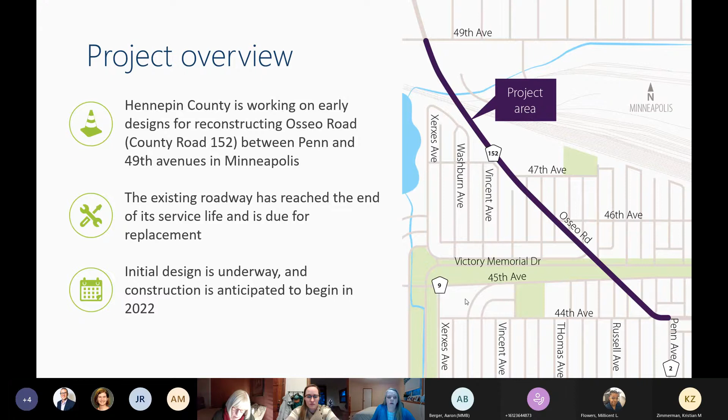The initial design was presented back in July via virtual open house and here at the August BAC meeting. We've also met with the Minneapolis PAC, the Hennepin County's BAC, Council Member Cunningham, and the Victory Neighborhood Association. So after reviewing the feedback from the community and working with our project partners, we've made some modifications to the typical sections and the geometry, which I will be presenting to you today. So a few of the general changes to the design include the addition of many new ADA ped ramps and crossings, the striping of the trail, and the pedestrian level lighting added to the typical sections. And the change of Russell Avenue from a right-in, right-out to a full closure.

I also wanted to note, since we last met, a dynamic speed sign was installed on the southbound side leading into the Penn Avenue curve. The city also relocated their advanced warning sign for this curve and did some tree trimming to help with the sight distance at the Penn Avenue curve.

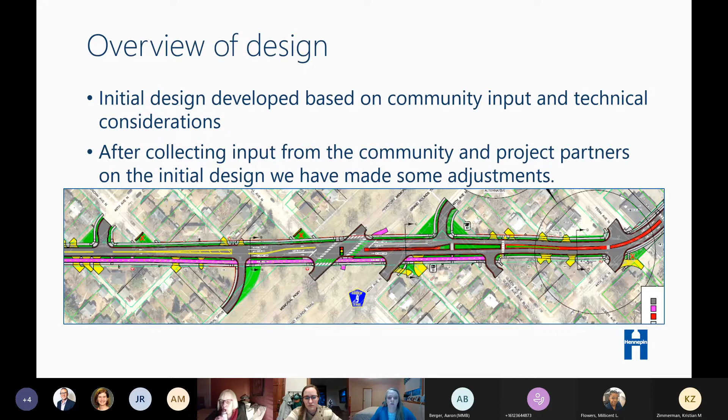With Osseo Road being a very diverse corridor with businesses, a regional trail, and residential areas, we kept the corridor separated into 6 major configurations or typical sections. The major change we've made is separating the multi-use trail, putting it on the west side, and adjusting the 2 sidewalks along either side of Osseo Road. I'll start on the north end and run through our proposed typical sections.

Starting on the north end, in this left typical section, we are matching into the existing roadway with 2 11-foot travel lanes and both left and right turn lanes at the 49th Avenue intersection. We are adding a 5-foot grass boulevard, a 10-foot trail, and a 6-foot sidewalk with a 1-foot detectable edge between them on the west side, and a 6-foot sidewalk on the opposing side, also separated by a grass boulevard.

On the north typical, or right side typical section, is our bridge section, where we're taking the existing 3-lane section and continuing with 2 11-foot travel lanes and outside 5-foot shoulders, which did not change. What did change is the 10-foot trail and 6-foot walk, separated by a 1-foot detectable edge, and then the 6-foot sidewalk on the opposing side.

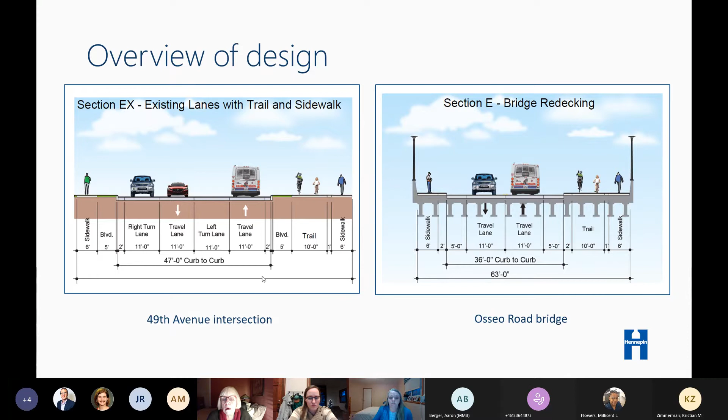As we continue into the corridor, we move into our main section, Section A. In this section, we are replacing the in-place 3-lane sections and outside bike lanes with 2 11-foot travel lanes, which remains the same as before. We are adjusting to a 5-foot grass boulevard on either side of the roadway with a 10-foot trail and 6-foot sidewalk, again separated by that 1-foot detectable edge, and then the 6-foot sidewalk on the opposing side.

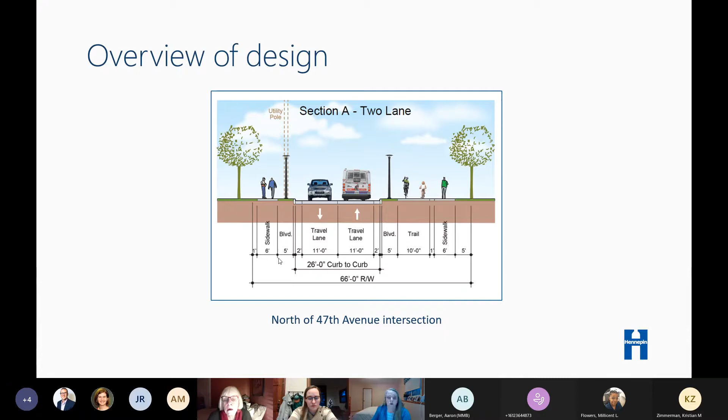Here we have a rendering of this section. We are looking south down Osseo Road at 47th Avenue. At this intersection, we are showing the proposed BRT station and the RRFB. You can also see the trail and walk separated by that 1-foot detectable edge, and grass boulevards on either side.

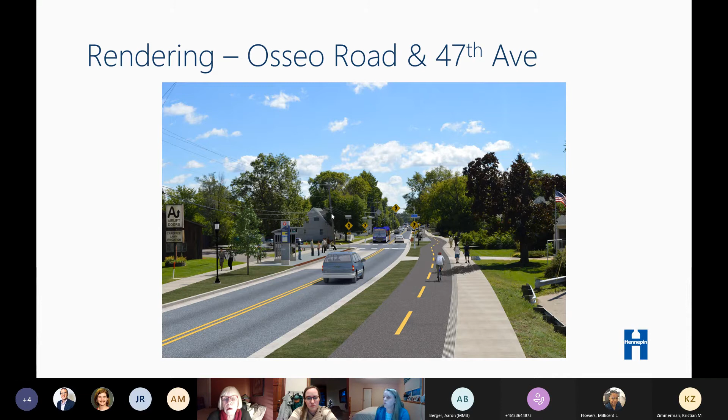As we continue down, we now run through the B and C sections. In the left typical section, we're transitioning to a 3-lane section with a left turn lane at the Memorial Drive and Russell Avenue intersections. This part remains the same; what we're adjusting is the 10-foot trail and the 6-foot walk, with the opposing side also having a 6-foot walk. These 5-foot boulevards are replacing the previous 7-foot boulevards that we had.

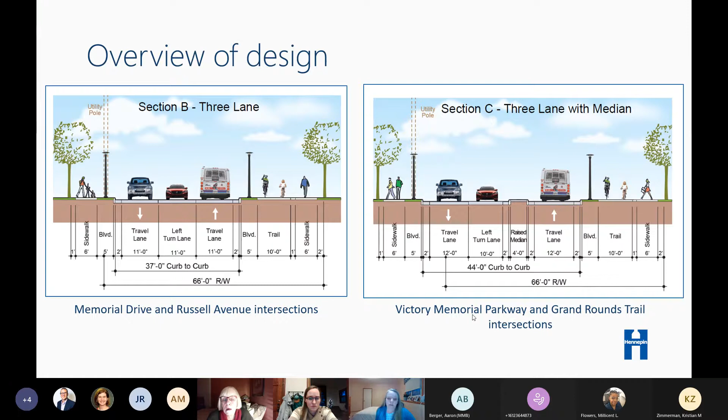On the right typical section, at the Victory Memorial Parkway and Grand Rounds Trail intersection, we introduced a raised median to define this left turn lane for additional pedestrian and bike safety. The part that was adjusted is the 10-foot trail and 6-foot walk, separated by the detectable edge, and the 6-foot sidewalk on the opposing side, again separated by that 5-foot boulevard.

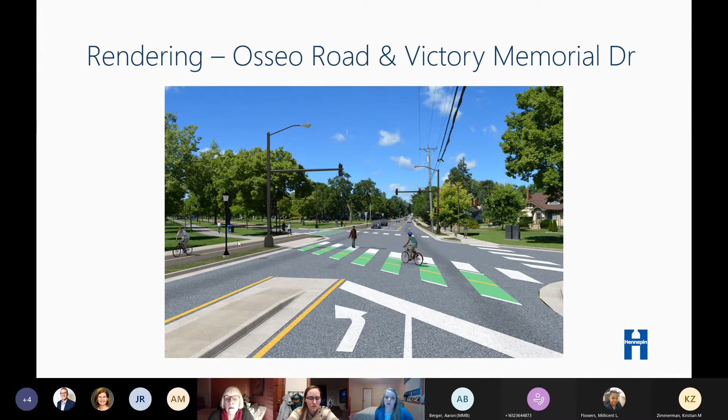Here's another rendering of this section. We are looking north this time at Osseo Road and the Victory Memorial Parkway or Drive intersection. In this intersection, we are showing the new signal, the proposed median, and pedestrian bike crossings. You can also see the trail and the walk on the west side, and the sidewalk on the east side.

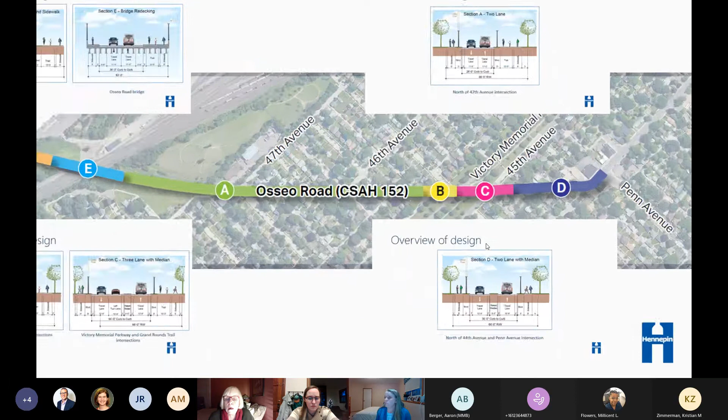The last section we'll move into is Section D, from Queen Avenue to Penn Avenue. In this section, we have two 12-foot travel lanes with a raised median. The need for this 12-foot lane and 2-foot gutter on either side is to accommodate a county snowplow and the space needed to navigate the curve that this typical section falls in. As we move into final design, as we start our drainage review of the corridor, we look at the median, and if it needs drainage structures, we need to keep that 2-foot gutter.

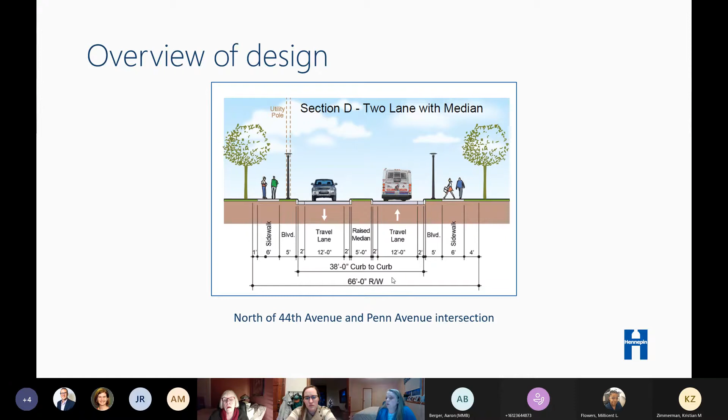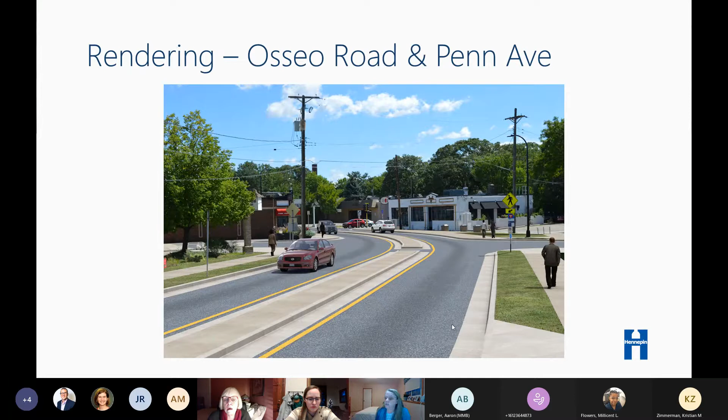If the drainage can be pushed to the outside lane, we may be able to reduce that gutter to a 1-foot gutter. We also transition the 10-foot trail on the west side to just a single sidewalk on either side with grass boulevards. We are also reviewing the possibility of adjusting the west side here to make this a multi-use trail through the section between Queen Avenue and 44th. Here is another rendering of this section, looking south at the Queen Avenue, Penn Avenue, and 44th Avenue intersection. You can see the raised median, the 2 travel lanes, the outside grass boulevards, and the 6-foot sidewalk on either side of the roadway.

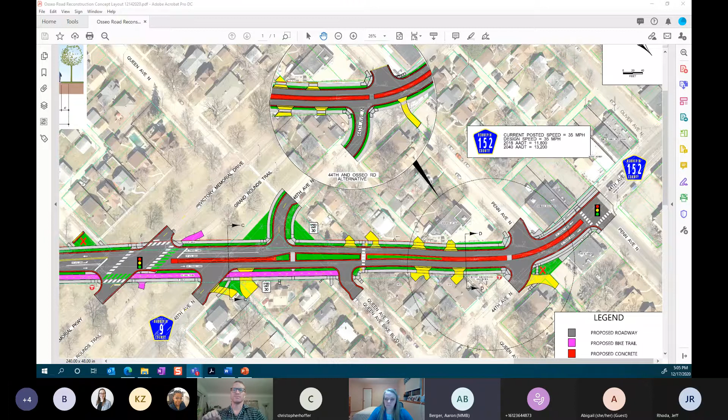I don't have any sense of what the chances are that we can get something that is not so terrible for walking. A way of, if it's going to be medians, it needs to go through to really reduce that turn radius. Anything less than that, and it's very clear that no one outside of cars is being considered.

I'm not sure how to put that in a resolution. Okay, I'm calling out the currently designed medians. So yeah, is that okay? Sure, if other people are comfortable with that.

I'm processing this project. Aaron, can you email that resolution as you've written it to Millicent, and perhaps we will send it out to the full committee, and if there are strategic specific changes, you could prepare those and have them ready for the full. Yeah, for sure, I mean, it's hard to draft on the fly, but yes. Sure, right, no, totally, yeah.

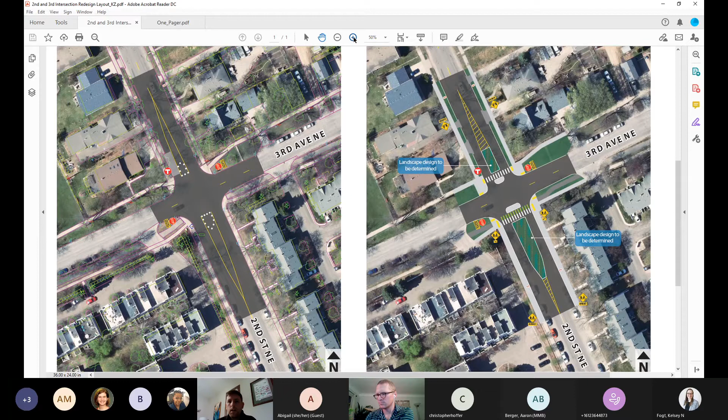So what we've done, zooming in, is really just formalize those medians into a permanent design and have upgraded or are looking to upgrade the corners here to give ADA compliance. This design really narrows down the travel lanes significantly from what's out there, and also adds in medians that would be permanent with a little bit of striping behind them to kind of lead in.

These medians would absolutely be filled in with landscape. We're still working on what that landscape would be, whether at some point it would just be turf, or if it's going to be planted with perennial grasses that would be taken care of once a year, native species.

Additionally with the crosswalks, we're looking to mark those potentially with the sidewalk through here, and with the trail, upgrading to have the ADA curb ramps, keeping the signage that's currently out there, but also adding some additional signage notifying that we have a trail crossing here, and roughly 150 feet back would be more signs that would just warn motorists that there is a crossing up ahead. And similarly on this side, you'd be notified of a trail ahead.

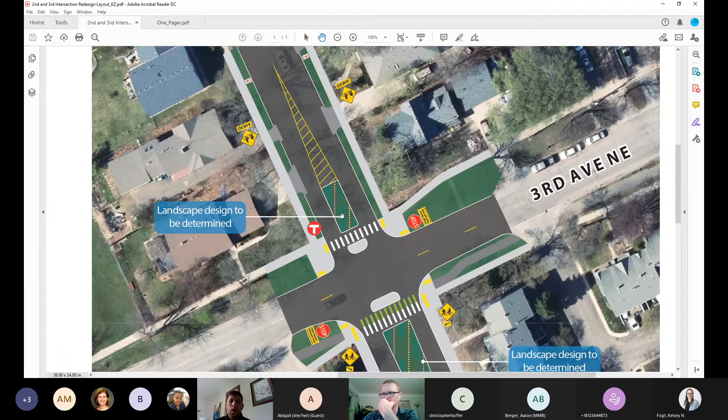Again, there would be some landscaping determined at this median. We've provided nose outs to give further protection to pedestrians within the crosswalk, giving them a little bit of refuge and increased safety. The bus stop stays uninterrupted from its current stop.

Additionally, speed limits have been updated in this area. We're at 25 miles an hour now on 2nd, and 20 miles an hour on 3rd.

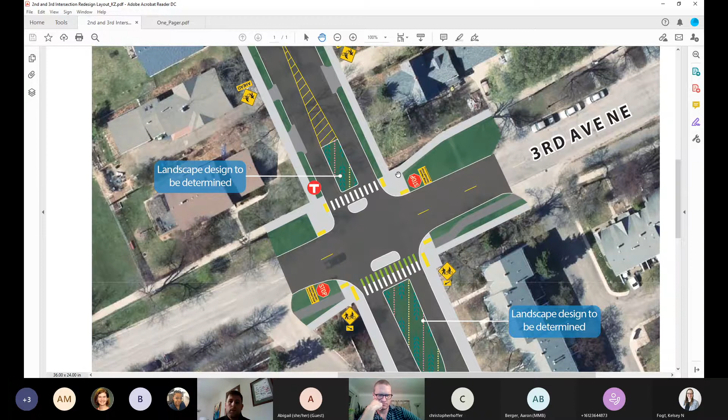With this, we would slightly update a little bit of the sidewalk. There's some odd geometry that was installed here originally, so we're looking to straighten up the sidewalks as best we can to take out those jogs, due to some infrastructure we just can't get into. Some jogs are being corrected to an extent but wouldn't fully be eliminated, but it's definitely an improvement over what's currently there.

With that, I'll open up for questions and discussion.

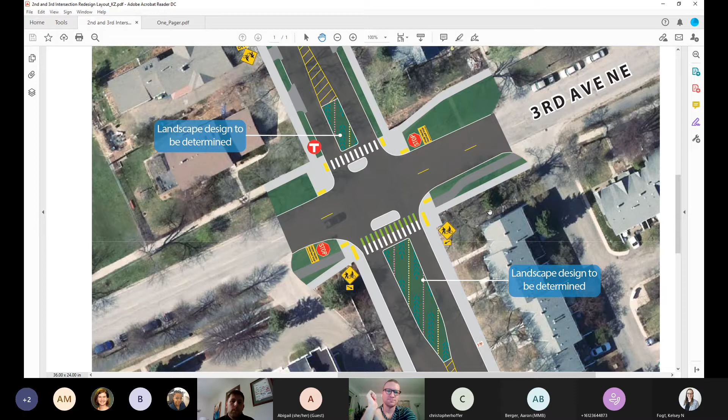Why is it a median instead of bump outs? So bump outs were tried at this location back in, I think, 2015, and they were just at this corner and then at this corner. They did have a little bit of success, but there were still some crashes going on at this location. So it was changed to a median design in 2017 when the mill and overlay came through, and they found we were having better success with crash rates lowering with this design.

It wasn't tried with full bump outs on all corners, it was sort of half of what it would have been. So if you were heading north on 2nd Street from First, the bump outs would have been at those two corners—just two of the same corners on different sides of the street, not at all four.

This design shows medians on both sides of 3rd on 2nd Street. So it did narrow the crossing distance—essentially by the length of two bump outs with the original design. The crossing distance is the same now, but we're providing pedestrian refuge with the medians, and it'll snub out further than the crosswalk. Correct, there's a nose out on each median.

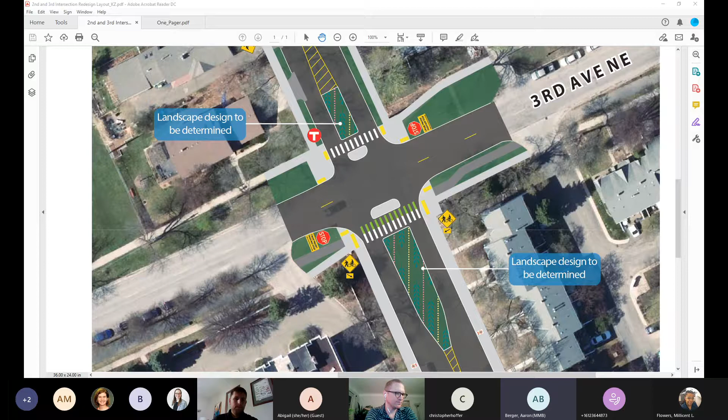The next project is West 31st Street pedestrian safety improvements from Amy Morgan. Hey everyone, thank you for having me. Yes, I'm here to talk about the West 31st Street Ped Safety Improvement Project at the intersections of Emerson Avenue and Dupont Avenue. As I mentioned last time, these two intersections were part of a pilot program back in 2013, and temporary bump outs were installed.

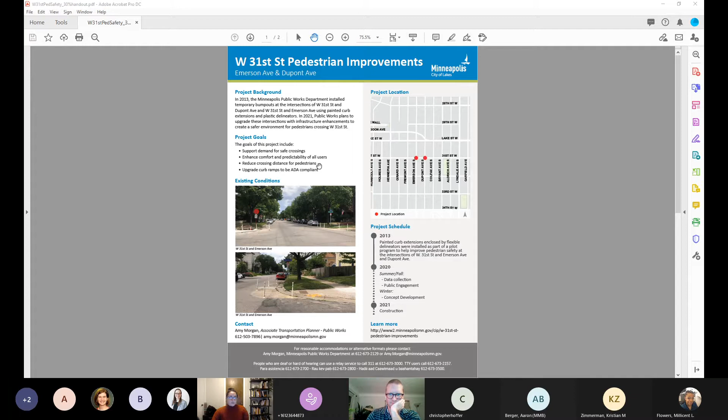You can see that in these images here. This was done through painted pavement as well as temporary bollards or plastic delineators. The goal of this project is to upgrade that infrastructure to make permanent safety improvements and enhance that crossing for pedestrians specifically. Some of the goals: supporting demand for safe crossings, reducing crossing distance for pedestrians, making sure there's better comfort and predictability for all users at these locations, and upgrading the curb ramps to be ADA compliant.

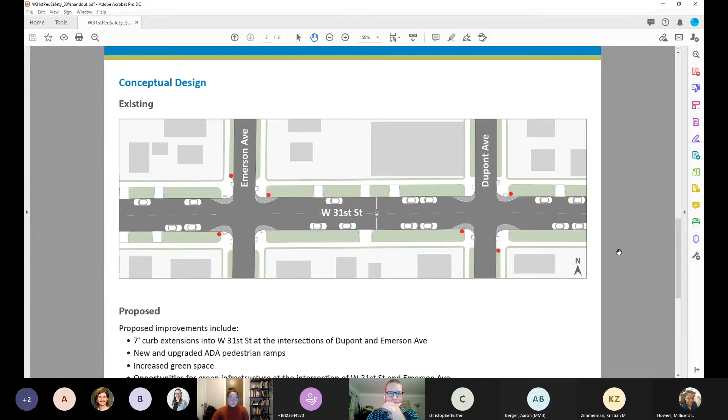So we'll look a little closer at what currently exists. You can see here the temporary bump outs with the bollards. They're about 7 to 8 feet wide currently. There are also 4 corners that do not currently have any sort of pedestrian ramp or curb cut. So with this project, we'll look to make those curb extensions permanent. We're looking at doing a 7-foot curb extension into West 31st Street at both intersections, and we'll be upgrading and installing new ADA ramps at all of the intersections here.

This project really provides an opportunity for increased green space at both of these intersections, and looking more closely at Emerson, we're looking at potential green infrastructure opportunities that would exist at this location. So that was a very quick overview, but I'll open it up for any questions or comments people might have.

It looks like the bump outs are only going to be built out to 7 feet, which seems like it doesn't reduce the crossing distance as much as feasibly could. Is there something that can be done to increase that? So the 7 feet, West 31st Street is identified as a future bicycle corridor in the Transportation Action Plan, and this 7-foot distance allows for 2 travel lanes and 2 bike lanes to continue through at both of these intersections.

So it's a future project plan? Yeah, there's nothing in the CIP for West 31st Street currently, but it is identified in the Transportation Action Plan. Okay, we call it not to preclude future bike lanes. Is it possible to get that additionally extended by a temporary bump out, so it's like a permanent plus a temporary, to really help things?

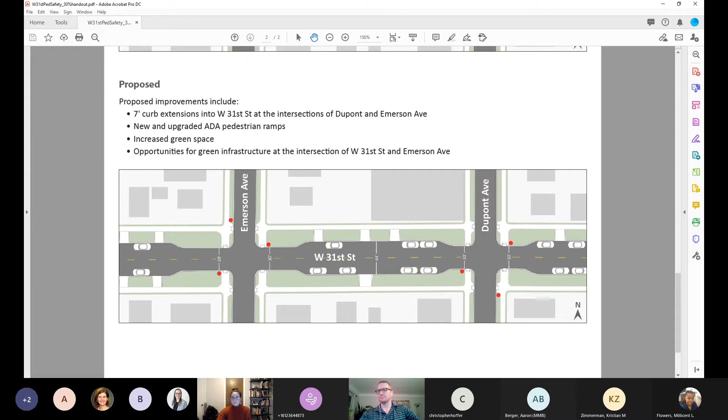All right, and Katie White will be our final presenter of the evening. She's going to be presenting a 15% design for Franklin West and updating us on the Farview Park sidewalk gap.

Thank you so much. I'm actually going to start with Farview because it's at 30%, and I want to keep it at the same level that your previous agenda items have been at. So I'll start with Farview Park. I'm going to start by sharing the street view and then we'll shift to the graphic - my intent was to show a graphic.

This is when I give everybody a heads up that I might have lost my ability to see who has their hand raised or questions, so please interrupt me freely if I need to stop talking.

My goal was to show you a graphic that was easily interpretable. However, we ran into some staffing and timing issues on our end, and I wanted to get this to you sooner - I didn't want to wait until January. So if at the end of this meeting the result is, no Katie, we can't take action or give you feedback on this until we have a more easily digestible graphic, I'm happy to take that feedback and I'll see you again in January. In the meantime, I'm going to start here.

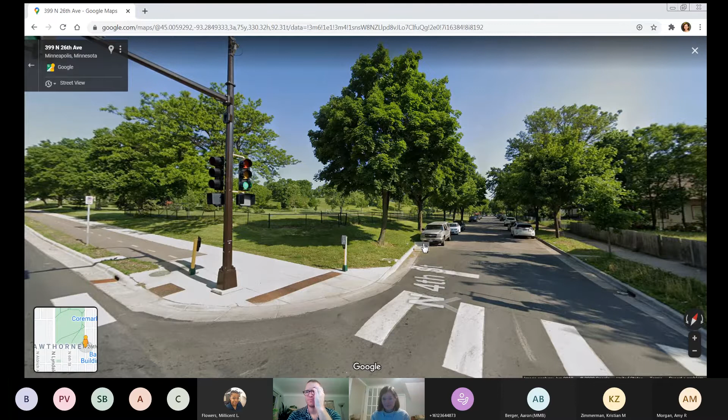And you can see here's the park, and there's a gorgeous tree canopy here, exactly where you would expect a sidewalk to go. Our goal is to fit a sidewalk into the space for 2 blocks along Farview Park North. So I'm going to switch to the graphic now.

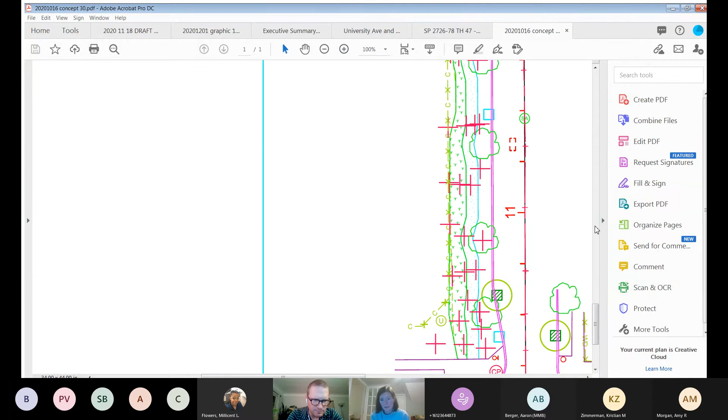It's a sort of an engineering schematic. I'll zoom in, but tell me if I'm going too fast or you need me to rewind. So here's an aerial view of 26th and 4th. Again, east-west is the bicycle facility you just saw, and the park is here to the west. I was here several months ago with the PAC to introduce the project. I'm here to show you the results of that.

It shows you that beautiful tree canopy, and our goal was really to get in a sidewalk while taking out as few trees as possible, because it's such an important amenity. I'm really happy to say we were able to accomplish that. This schematic for the whole 2 blocks indicates no tree removal.

The other thing from an engineering perspective we were nervous about was requiring a retaining wall. This is called Farview Park because it's very hilly - there's a gorgeous view of the downtown skyline if you climb to the top of the hill. So we were concerned about the need for a retaining wall from an engineering, maintenance, and cost perspective. But with this design, we've got a very small retaining wall, maybe 6 inches max - it doesn't really count as a retaining wall. So we're really proud of that accomplishment, and I'll show you how we did it.

Again, this is hard to read, but if you follow the park, which is the green line here, the green boundary, and then the other side of the sidewalk, the cyan color, you can make out a sidewalk that is essentially bumping out for every tree in this case.

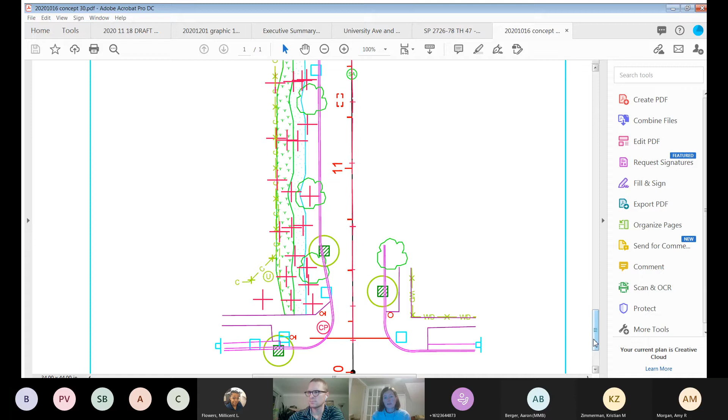This is probably not ideal. We looked into creating a straight sidewalk path. To create a straight sidewalk path would require a much larger retaining wall feature, which would be so expensive as to possibly preclude the installation of the sidewalk at all, given our budget constraints.

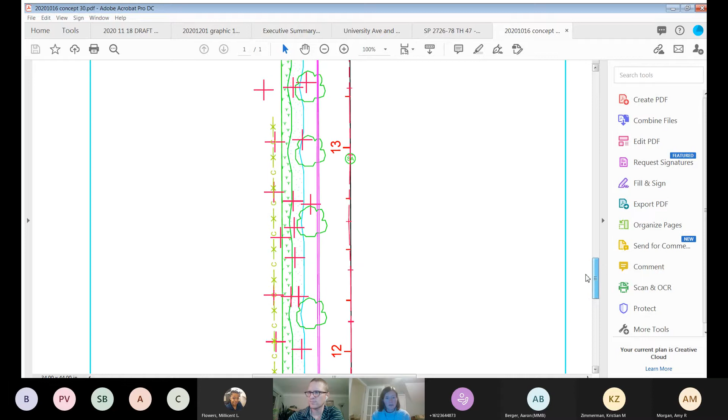So I'll move north. If you follow this sidewalk, which is again green on the left and cyan on the right, the space in between is the new proposed sidewalk. As we go north from 26th, you can see that just as the trees are evenly spaced, the sidewalk evenly bumps to accommodate the tree.

So here we are at 27th. On the north side of 27th, this dark purple feature is the existing trail path, park trail that exists. It dumps out into what is now just a curb. This curb would then be replaced with an ADA accessible landing. We're adding a landing here on the south side as well, and then updating the receiving corners on the opposite side of 4th from the park.

Can I interrupt for a second? Yeah, thank you, for 2 questions. One is how wide is that sidewalk - you may have said it and I just didn't hear. And the other is, that path it intersects with - is bituminous, and is it going to be changing surfaces as you cross that path?

Sure. The park trail is concrete, so it would not be changing surfaces. And...

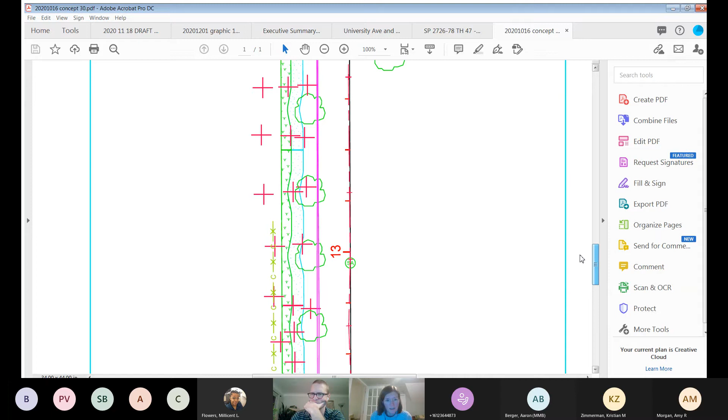I'm convinced the sidewalk is 6 feet, but now I'm afraid I'm wrong, so I'm going to try to find it. Maybe it's further north - I think it's 6 feet, but we'll see if the diagram corrects me later as I go further north.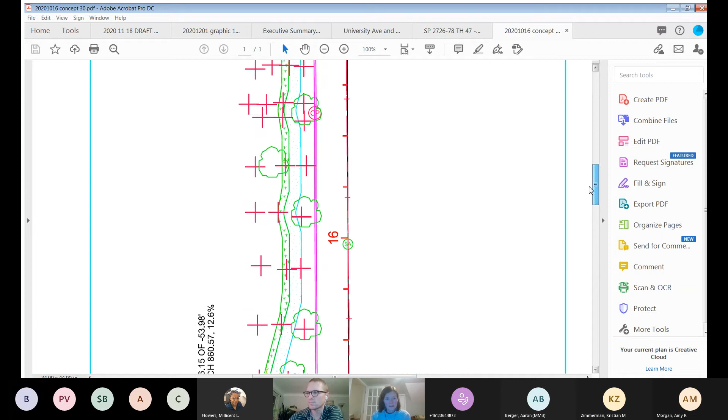So this is 27th. All 4 corners are getting upgraded treatment here. And then going further north, again, the sidewalk fairly evenly spaced bumps out around the trees. And then this is 28th.

So this is the last intersection. Again, we have what is today a concrete trail with an interior-to-the-park access, which currently hits the curb at this very sharp angle. And again, it's just the curb - there's no ramp.

So the proposal here, if you make your way through the weeds, is to straighten out the path to a 90-degree turn here, and then a receiving end across 4th. We also don't have it illustrated here, but we are improving this quadrant of the intersection as well to do the north-south travel across 28th.

This is one area where we almost did touch a tree. This tree on the corner, the southwest corner of 4th and 28th, the park board believes to be a very healthy elm tree. Considering they're still removing several dozen Dutch elm diseased trees every year, their intent was to avoid taking out a perfectly healthy one, and it's quite large. That accounts for the location of this pedestrian ramp. So that's the short version. Happy to see you again in January once I have a visually pleasing graphic, or happy to take questions now.

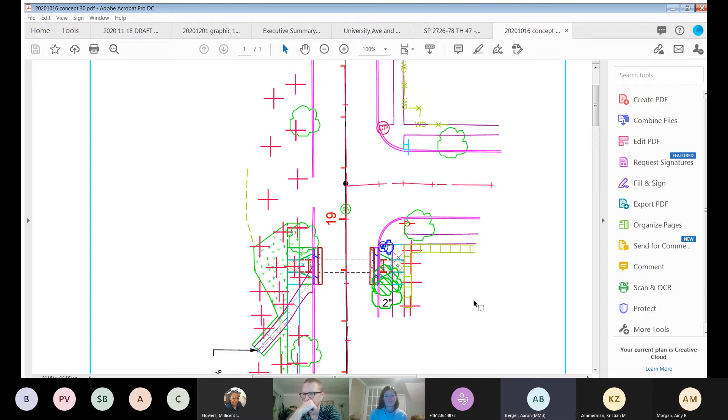Okay, so I wrote a resolution, tell me if anybody wants any changes. The Pedestrian Advisory Committee supports the current design for the Fairview Park sidewalk gap. We would like to make sure that the sidewalk is legible for users with vision impairment. Sounds good, sounds good, sounds great.

Perfect. All right, Katie's next project is Franklin West.

Katie, did we lose you for a moment? Looks like we did. How's everyone doing? Let's see. We're still alive over here. Yeah. While Katie's coming back, I'll just share the screen that she'll get to in a second, and we can just take a look at it.

Matthew, do you know if this is... 15% is kind of in between, is this like a resolution or just kind of a feedback session? I think Katie will be able to answer that better, but I think she would welcome direction now for sure. And then it's more like supplemental, you know, if you want to do it again at 30.

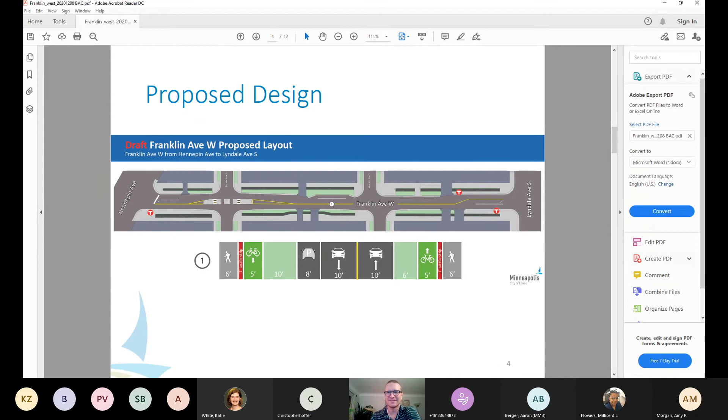I am back, I took a picture. All right, I am so sorry, my Teams entirely crashed. Oh my gosh. Well, you were doing the resolution, and I heard you do the resolution, and I was like, yeah, I heard the group agree to the resolution. So I was just thinking, okay, you guys are working on the resolution. And then I realized I was the problem.

Okay, that's not what I wanted to do. Katie, what we learned so far while you were gone is just curious if you are interested in a resolution at 15%, and also Julia is very prepared with questions. About Franklin? Sure, yep, all of the above. Yeah, great.

Okay, now I've for sure... oh boy, now it's doing that thing again, there it is. Okay, cool, I have lost connectivity to the outside world again, so interrupt me. I'll try to go through this pretty quickly to leave time for lots of questions.

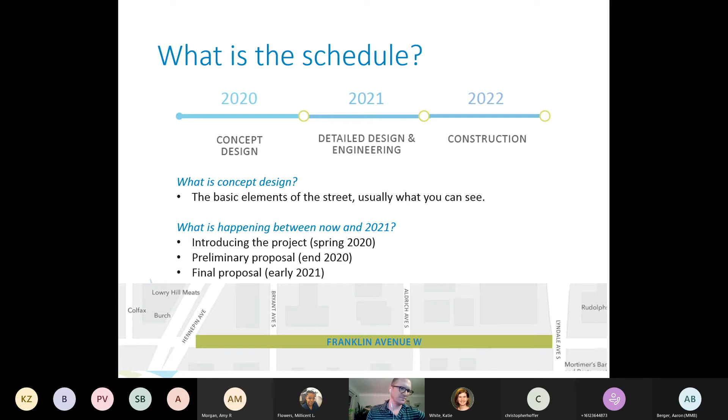Where we are in the schedule, we're at 15%. We're looking at coming to you with 30% probably in March. Pretty quick turnaround, but it's looking pretty doable with construction in 2022.

So we did some engagement over the summer. We had a Survey Monkey with a prioritization exercise and general questions about how people feel about the direction of the project. In the prioritization exercise, the number one desire was for improved walking facilities, and biking facilities were number two. There's concern about safe travel along Franklin, but also across Franklin. Improving the transit experience got a lot of comments as well because Route 2 has pretty good ridership. There were lots of requests for corridor greening and speed reduction for vehicles. We did hear some comments in favor of parking and car access, because the survey was in June and July, and a lot of people were becoming aware of the impacts of the pandemic on their lives, including an increase in drive-up, curbside, or other mobile services.

So this is a proposed slide, just for the record. No, interrupt me - should I just hold everything till then?

For anything about the pandemic, the fact that it's a disease that becomes more fatal with poor air quality seems to me to be something we need to focus on over and over, as opposed to going the individualistic model that clearly isn't serving us well, but focusing on that collective benefit. I did note that in the presentation when I was reading through it. Just that, let's think about the pandemic, but in a 'let's protect everybody' way, not individual benefit.

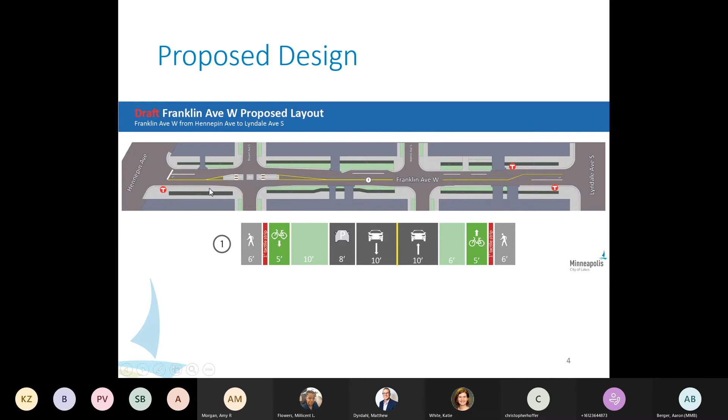This number 1 represents this cross section here. Going from north to south, you see pedestrian space, tactile strip, which we'll talk about in a second, the bicycle facility, one lane in each direction on either side of the street, boulevard space, some parking in this cross section, driving lanes, boulevard, bike space, tactile strip, pedestrian space. I'll note this graphic shows the bus stop very close to Hennepin, but in reality it would be closer to Bryant - that's a caveat I'll give with this.

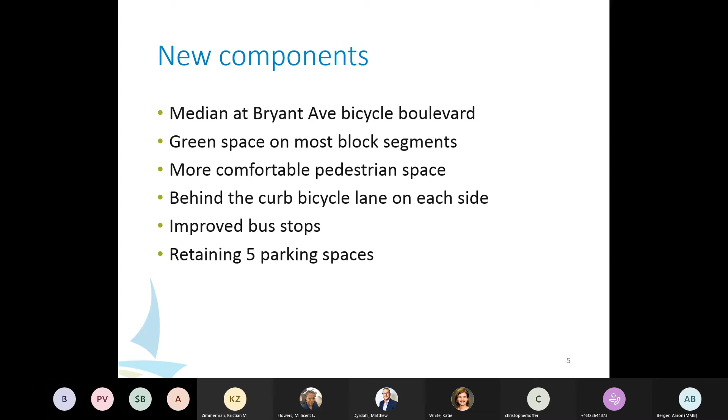New components of this include a median at Bryant Avenue Bicycle Boulevard, green space on most block segments, a more comfortable pedestrian space, behind-the-curb bicycle lane on each side, improved bus stops, and we are retaining 5 parking spaces - I forgot to check the number, we have somewhere around 27 or 32 parking spaces today, I'm not sure exactly off the top of my head.

The median at Bryant that exists today is part of the Bryant Avenue Bicycle Boulevard - the Loring Greenway is just to the north, a bicycle-only facility. There's a median today, but it's basically only in this far western portion and far eastern portion. Part of the proposed design is adding more concrete here to provide pedestrian channels north-south, and then adding a concrete portion in the middle to provide bicycle channels north and south as well.

This would eliminate left turning capabilities for cars in all directions, although it is mountable for emergency vehicle use. We're currently showing this as concrete.

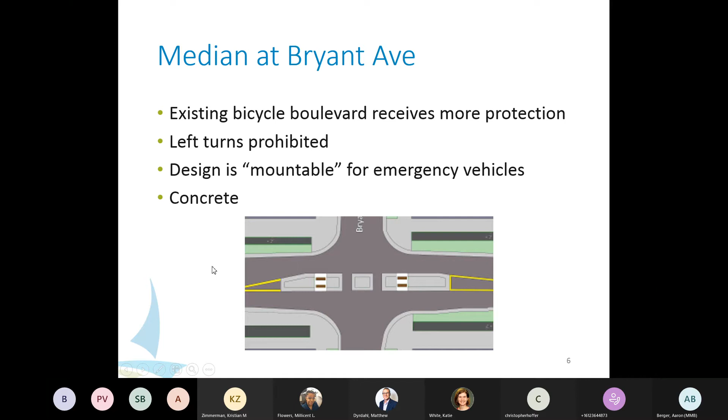Had a really good conversation with the Lowry Hill East Neighborhood Association last week about the potential for using this as planters, because the existing median is a planted space. It's up to them or any interested party to claim responsibility for the maintenance of that space, but we're showing it right now as concrete.

So again, you'll see this graphic many, many times. We're also showing an off-street bicycle facility here, one lane in each direction, north, south side, westbound, eastbound on each—not on the same, it's not a two-way on each side of the street, it's a one-way on each side of the street. So this bicycle facility is behind the curb at sidewalk height.

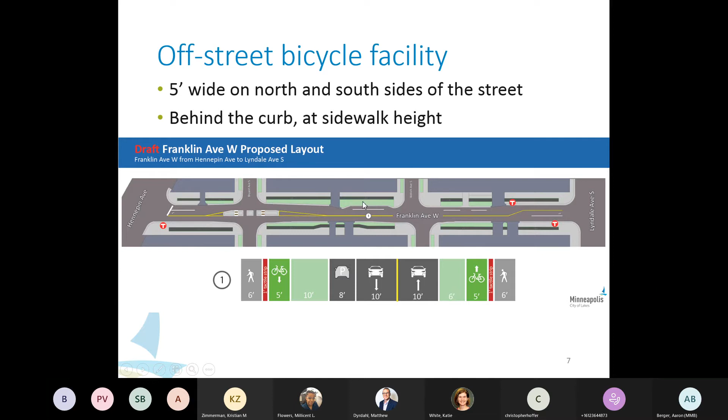So it's flush with the green space and also with the pedestrian space. We're also adding green space on most block segments. There are a couple of exceptions you can see, mostly at transit stops.

Right now, there is no boulevard space along Franklin. The sidewalk runs up on the back of the curb, and there's no plantings or green space of any kind. We're at a minimum of 3.5 feet. Usually the park board considers 4 feet the minimum for planting a small fruit tree, but we have segments here that are between 6 and 10 feet wide.

And so while we haven't identified a potential species of tree that could be planted here, it's possible that we're looking at actually some pretty nice trees. I mean, I just got done talking to you about Farview Park. I'm really into trees these days, I guess.

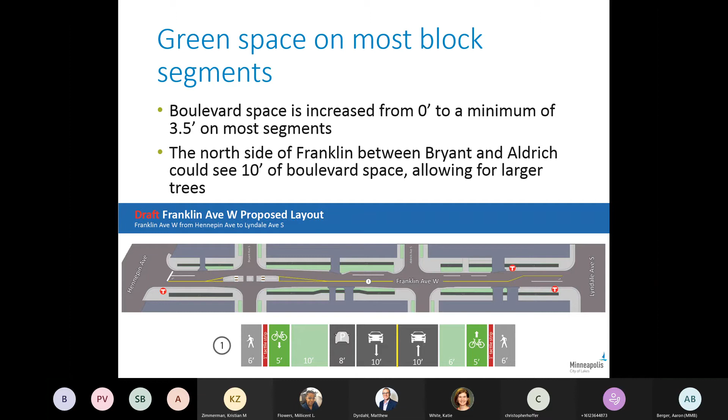Also adding more comfortable pedestrian space. We have 6 feet wide in every location, although I think we get closer to 8 or 9 feet wide as we get closer to Hennepin Avenue.

And we're also discussing this tactile buffer strip here. This is still kind of an experimental thing in the city of Minneapolis. The newly reopened Hennepin Avenue downtown segment has this one-foot tactile strip. It sort of functions like a truncated dome. It's not this bright red color—it's more like a brick red color on Hennepin Avenue right now.

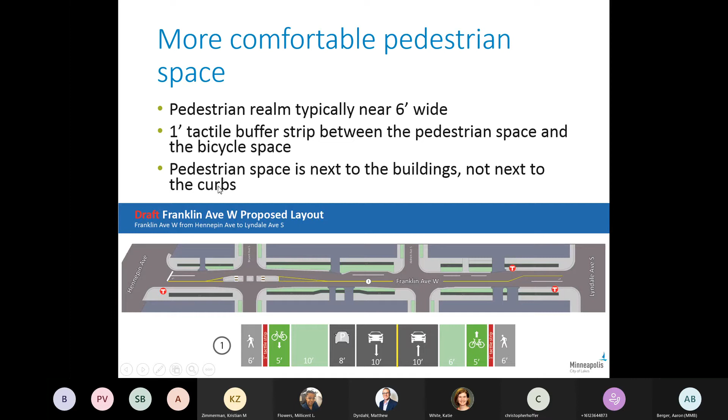And we're going to evaluate its usefulness on Hennepin and evaluate its potential use here on Franklin too, because the pedestrian space is right next to the bicycle space. And this pedestrian space is next to the buildings, not next to the curb as it currently exists today.

So improved bus stops, I'll move from west to east. On the Hennepin Avenue side, again, this bus stop is showing too close to Hennepin. It's really going to be a little closer to Bryant than it is today.

Metro Transit's very excited about this reconstruction, and we're looking at pulling utilities to the shelter. Right now, it is just one signpost on the street. Metro Transit is committed to putting a standard size shelter here, and hopefully we can get some utility access to them too for electricity and other services as well.

And we did some playing around with circulation here, but it is possible to access and get into the bus shelter and out of the bus shelter without running into the bike lane. We don't have all the dimensions here, but we spec'd it out, and you should be able to get out of the bus shelter without stepping in the bike lane.

This bus shelter here in the southwest corner of Lyndale will be a full shelter as well. This stop in the northwest corner of Lyndale, this is mostly where people disembark because it's close to the end of Route 2. There isn't really a stop after this except for the layover location. And so it's going to remain a signpost with the bench that exists there today.

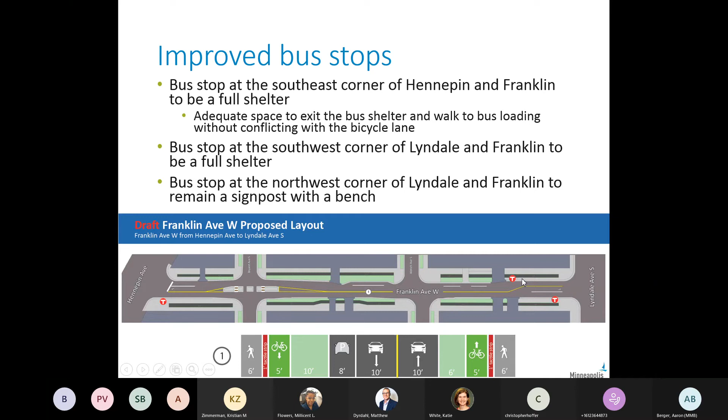Five parking spaces are proposed to be retained along the north side of Franklin. We have put three into this parking bay here. The bay pulls the parked cars out of the line of traffic to provide a little bit of protection there. And then we have one here where this white line is, and this other white line here, for a total of five parking spaces on either side of Aldrich.

Currently, the restrictions for parking on Franklin vary quite a bit, and we haven't determined yet any parking restrictions for the new design. That determination will be made later, but if there are strong feelings, take those comments now.

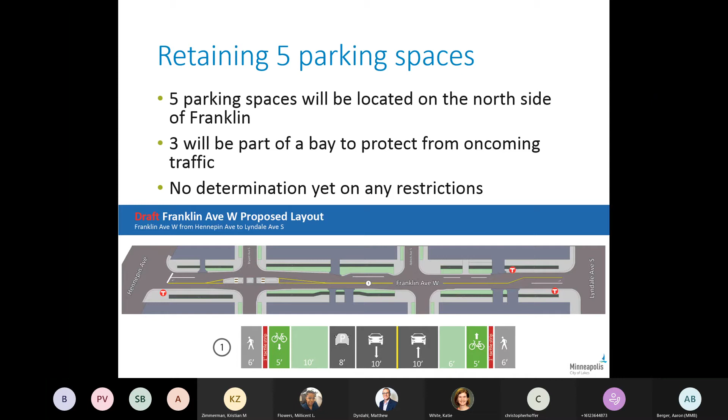So I'll stop there, but I'm happy to go back and go into more detail if there was something that I said that you're more interested in hearing about.

I know Julia's going to have a lot of comments. I just had a question, which is, given the busyness of this overall area, would it be feasible to do something at like Bryant and Franklin, like adding RRFBs to increase visibility of pedestrian and bicycle crossings?

That's a good question.

We can certainly ask that question. Let's find out more about that. I don't know, Matthew, if that would be standard use, though it might be standard use in the city. There's likely going to be... I don't know what the threshold is in this case. For some reason I was not thinking an RRFB would be necessary here. But why don't we bring that question to our traffic operations team and see what they think? We can certainly just ask that it be looked into. Sure, no one's asked that yet, so I'm happy to ask.

And in addition, if RRFBs are used, we're able to zebra stripe that crosswalk. That would be awesome, and it would prioritize the bike boulevard. Yes, the zebra north-south here will be striped fully. Good catch too, Abigail, on that.

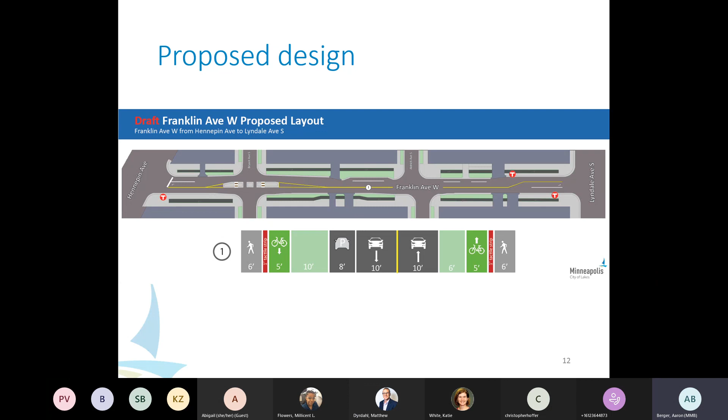Okay, I have just a quick resolution, and then we can go for the night, and I'll email it out. I wrote: the Pedestrian Advisory Committee supports the overall concept of the 15% design for Franklin Avenue West reconstruction. We ask for consideration of RRFBs at the intersection of Bryant and Franklin to provide greater visibility for pedestrian and bicycle crossings, and features such as a handrail to support pedestrians on the slope of the hill.

Great, and if we want to add anything at the full meeting, we can do that. Or Aaron, if you want to send this draft to everybody at this meeting, or the PAC members here, we could always add content.